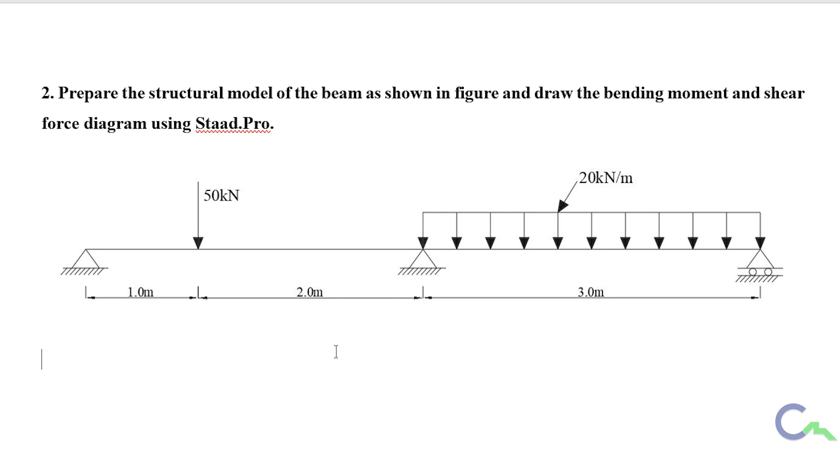They gave one continuous beam which has two spans. The first span is 3 meters and second span is 3 meters. In the first span, there is a point load acting at a distance of 1 meter from the left end, and for the second span, there's a UDL of value 20 kilonewton per meter. They also gave two hinged supports and one roller support.

So now I am going to explain how to solve this problem using STAAD.Pro.

I am using SELECTseries 6 version of STAAD.Pro. I will start with a new project, choosing space type of problem, and name it beam number 02. I will select length unit as meter and force unit as kilonewton, then click next. Here I will choose add beam type of problem, then click finish.

By default we can see the grid of 1 meter into 1 meter length. If this grid is not available, I will go for this icon, that is snap node beam option. If I click on that, I will get the grid.

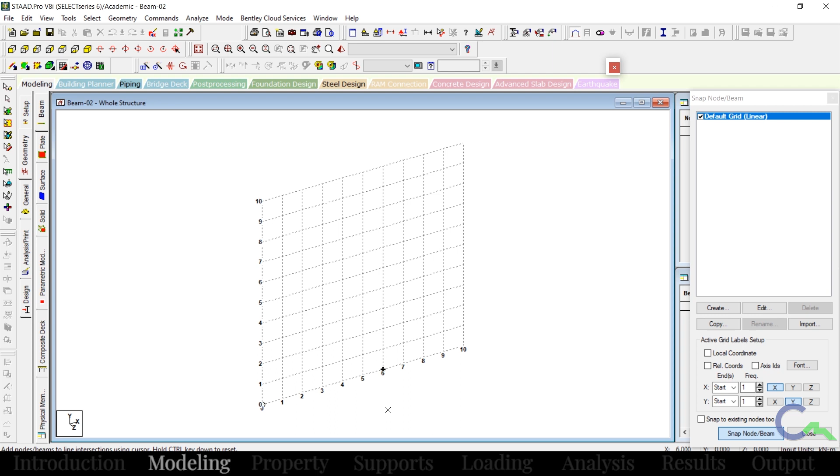First I have to prepare the beam, considering it from support to support. The first beam length is 3 meters, so I will start preparing that model, creating one beam from 0 to 3. We have to make sure that this snap node beam button is in blue color, then only it will snap to the points or grids.

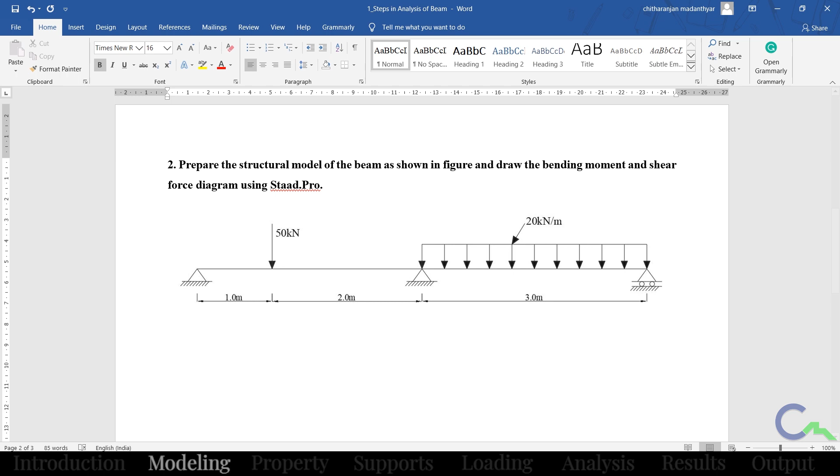The second beam is also having a length of 3 meters, so from 3 to 6 I am going to create one more beam. Once it is created, then I will close this window.

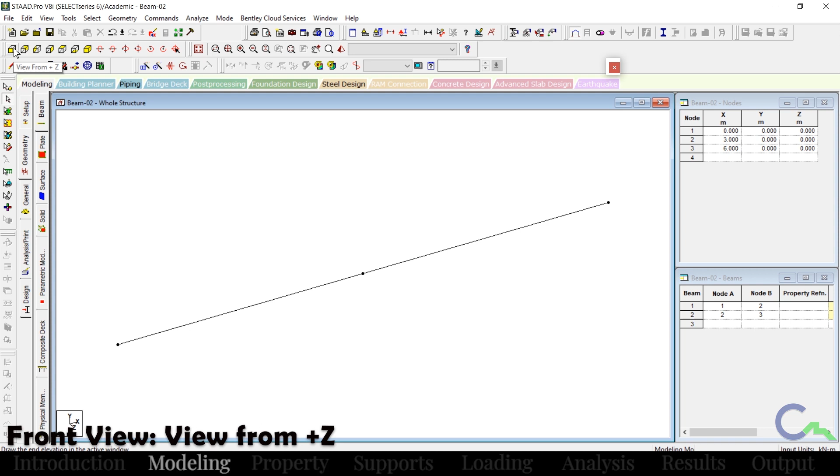If you want to see the entire structure, I will go for this icon, that is display whole structure. This is in isometric view. I will go for this icon, so now I can see it in the front view.

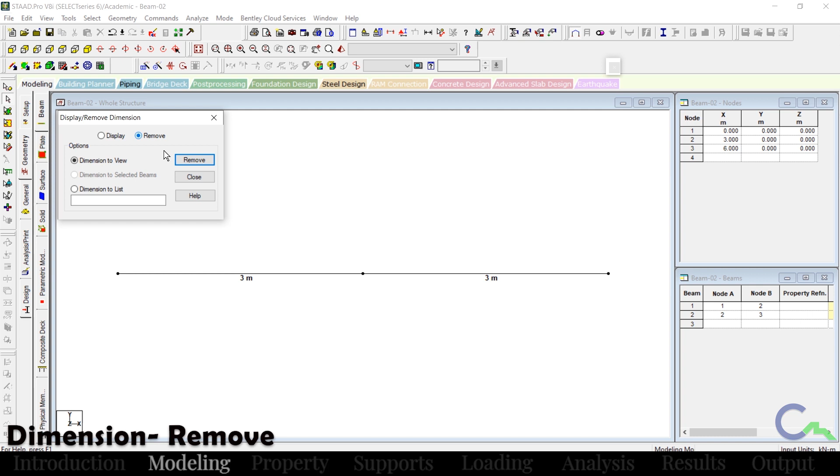If you want to check the dimension, I can go for this icon, that is dimension. If you click on display, it will show the length of each and every beam. If you don't want to see that, again go for the dimension option, then go for remove, and click on remove. It will remove the display of dimension.

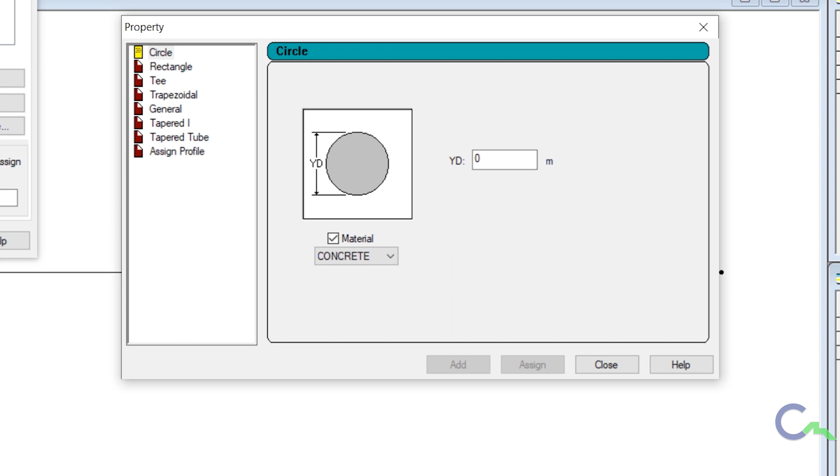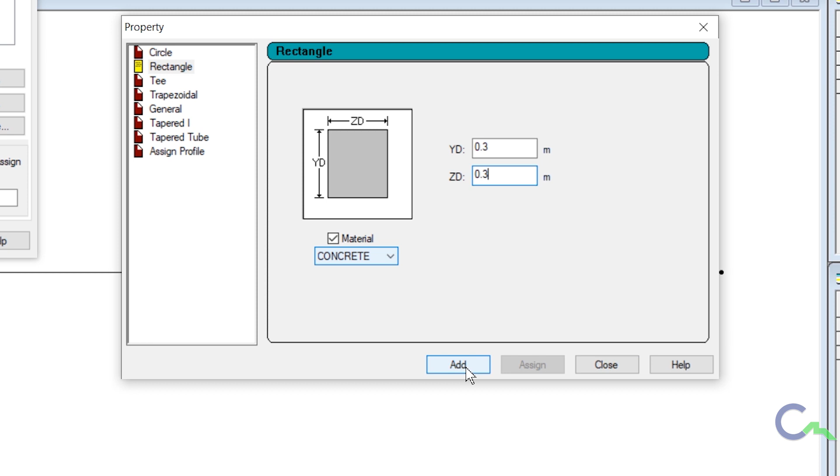Once I create the model, the next step is to create the property. I will go for this icon, that is property page, then go for define. I am going to give the property for this beam, that is rectangular property. I will give 0.3 and 0.3 as the dimension of the beam, so in feet it is 1 feet into 1 feet. Then I will select concrete as the material, click on add, then close.

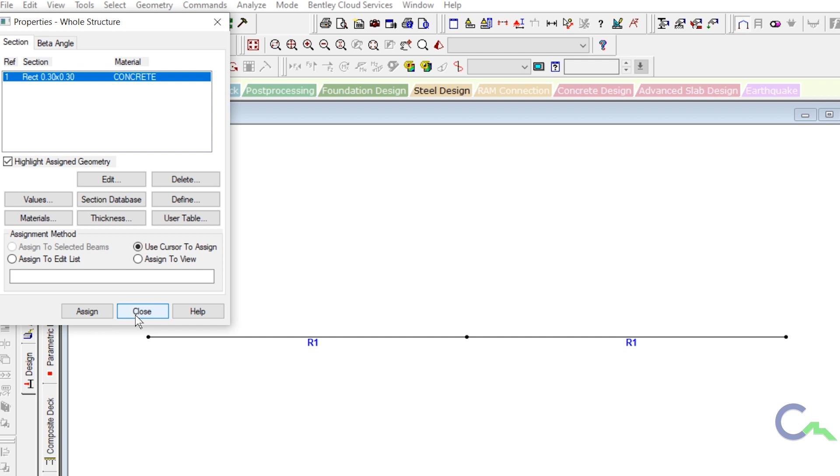Now that the property is created, I am going to assign it to these two beams. I will go for use cursor to assign option, then click assign, then click on the first beam, then the second beam. Once it is assigned, click on assign again, then close. You can see whatever property you provided using the 3D rendered view option that is available here.

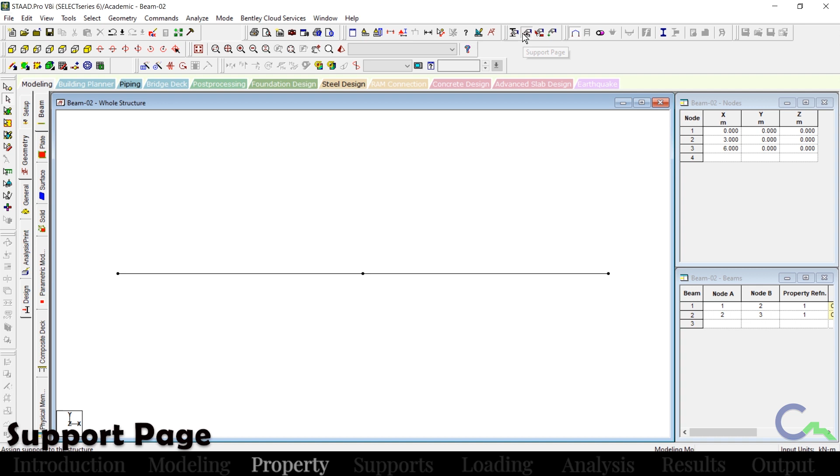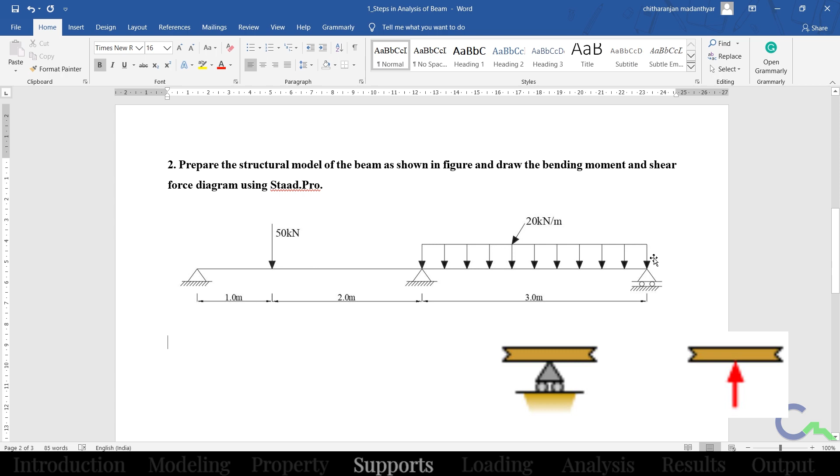Once I provided the property, the next step is to give the support. I will go for this icon, that is support page next to the property page. Looking at the diagram, the first support is a hinged support, which has two reactions, horizontal and vertical. The second support also has two reactions. The third support is a roller support, which has one reaction, that is in the vertical direction.

In STAAD.Pro, I will go for the support page, and I will show that one again. In this, I will go for create option, then go for fixed but option. The first support I am going to create is a hinged support, which has two reactions, horizontal and vertical. Whatever I check, I am releasing in that direction; whatever I am not checking, that is restricted. So I will click on add, and I have created that support.

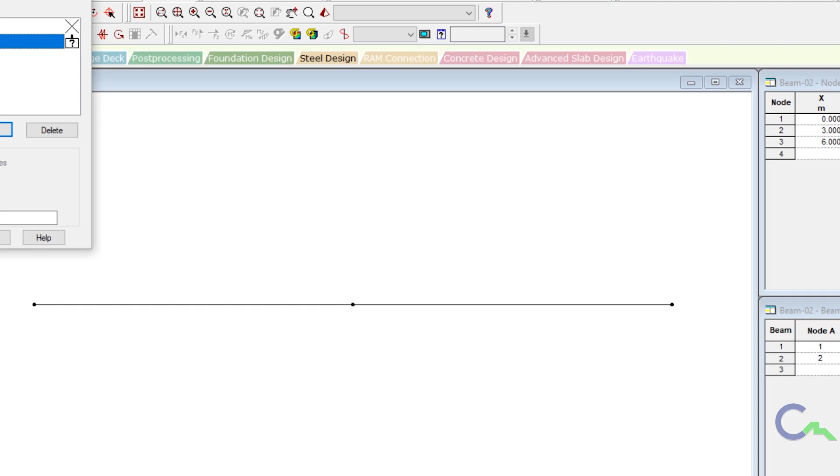I have to assign supports on the first node and second node. Using the cursor, I click on assign, then click here, then click on the second node. Once it is assigned, I click on assigning again.

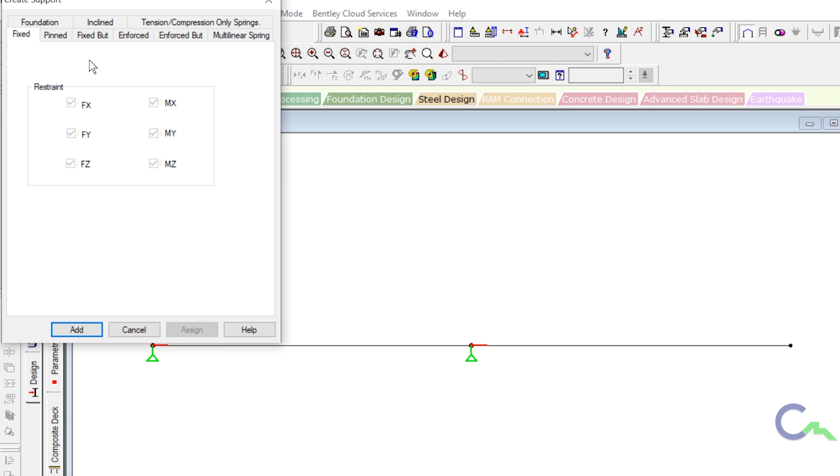The next support I am going to create is roller support. I click on create and go to fixed but, and restrict it in the FY direction, then check all other directions so it is restricted in the Y direction. Then click on add, and select that support, support number 2.

Using cursor, I assign on the third node. So I assigned all the supports. Then I will close this window. Next thing I am going to do is apply loading.

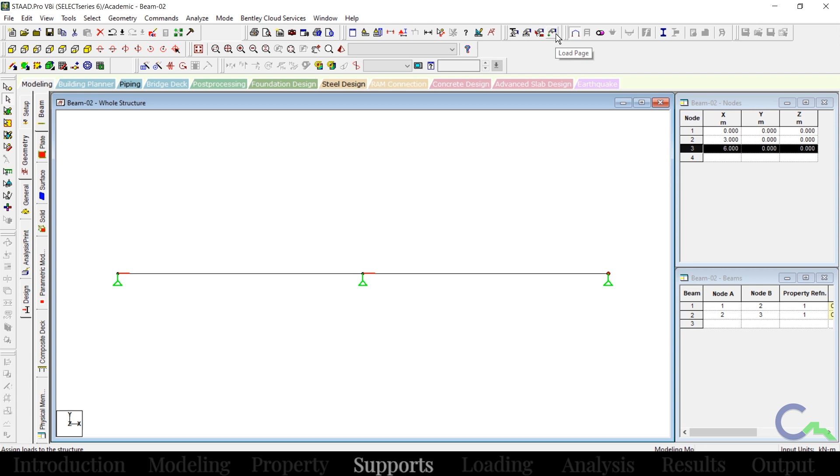I go to the load page, that icon is available here. Under this load case detail, I am going to create one folder. Click on load case detail, add, then by the default name I create one folder. Then click add, then close.

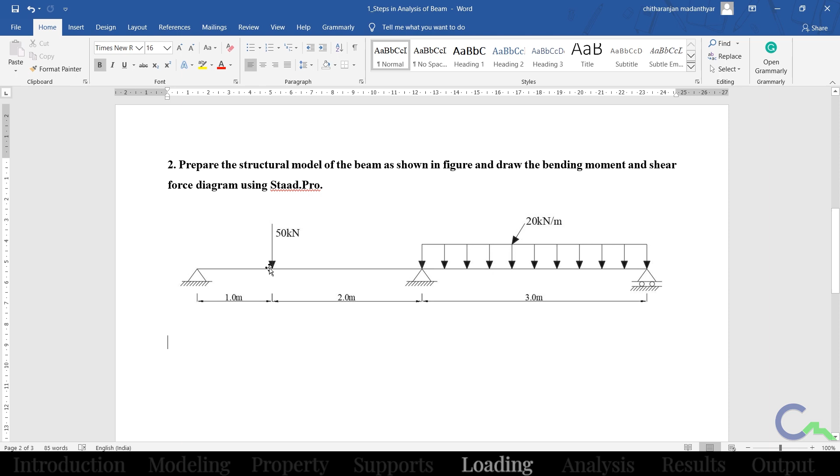Under this created folder, I am going to create two loadings. The first loading is 50 kilonewton, active at a distance of 1 meter from the start node. First I will show that one. I click on this load case 1, then add.

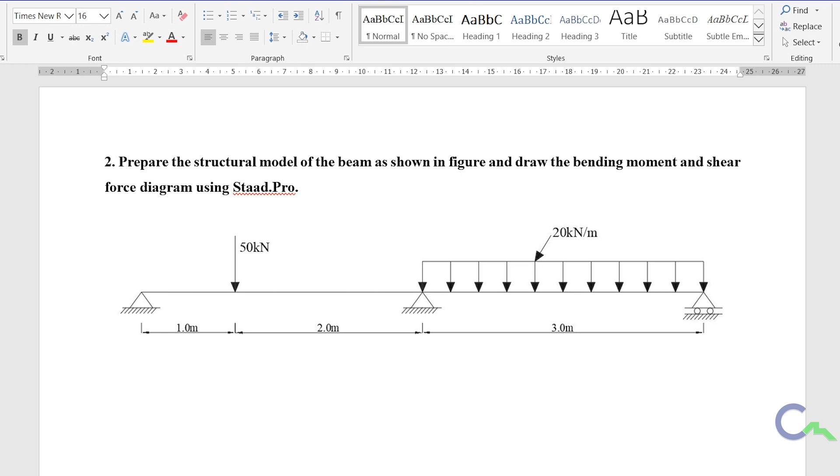Under member load, the first force I create is concentrated force, also known as point force, with a value of 50 kilonewton acting in the downward direction. So I apply that force, 50 kilonewton acting downward, under member load concentrated force, entering minus 50.

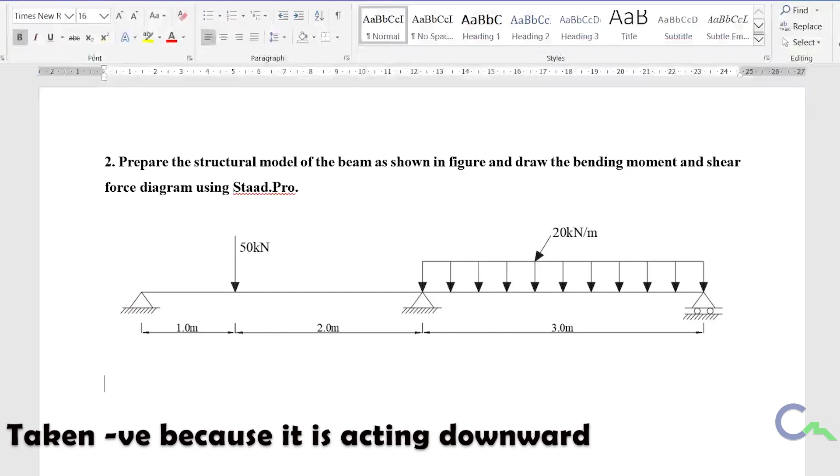In the problem, it is acting at a distance of 1 meter from the start node. While creating the member, I created this as first node and second node; for the second beam, this as first node and second. Therefore, from the first node, it is at a distance of 1 meter, so I have to give this D1 value as 1 meter.

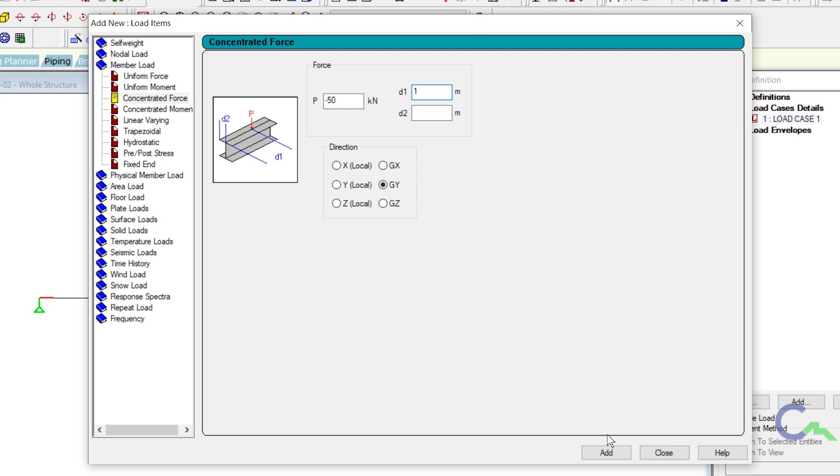Suppose if it is acting exactly at the center, there's no need to give this D value. But if it is not acting exactly at the center, I have to give the distance from the left hand side. Then it is acting in the GY direction. Then click on add, then close.

So I created the first loading, a point load of 50 kilonewton acting at a distance of 1 meter from the start node. Going to assign using cursor, I click on this option assign, then click on the first beam. So I can see the loading, but it looks like a very high value because the scaling is not proper.

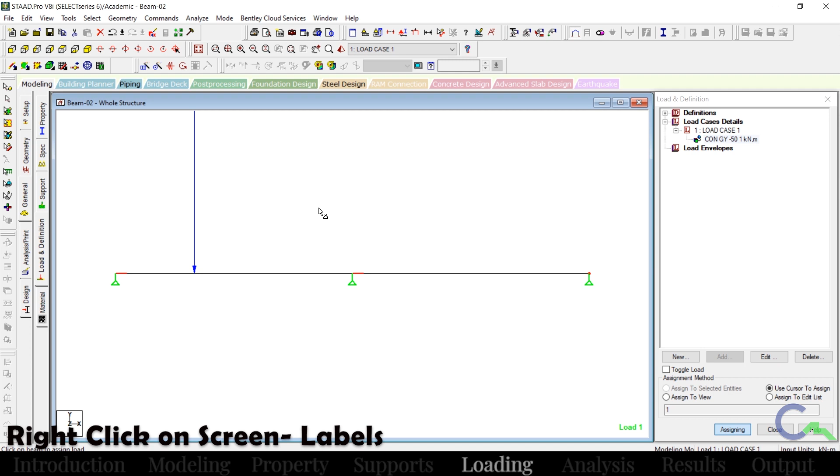To change the scale, right click on the screen, go to label, and you will get the option scales. Before changing any scale, click on this icon, apply immediately, because as I change here it updates on the screen. So I applied the point force.

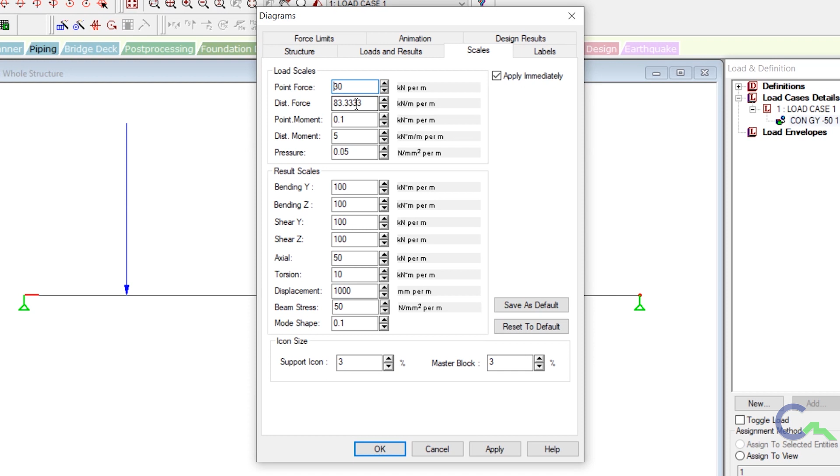I will increase the scale here, maintaining it at around 30, which gives a nice look. I will make the distributed force scale also 30, because I want to maintain all the scales uniformly. So whatever is required you can change, then click apply.

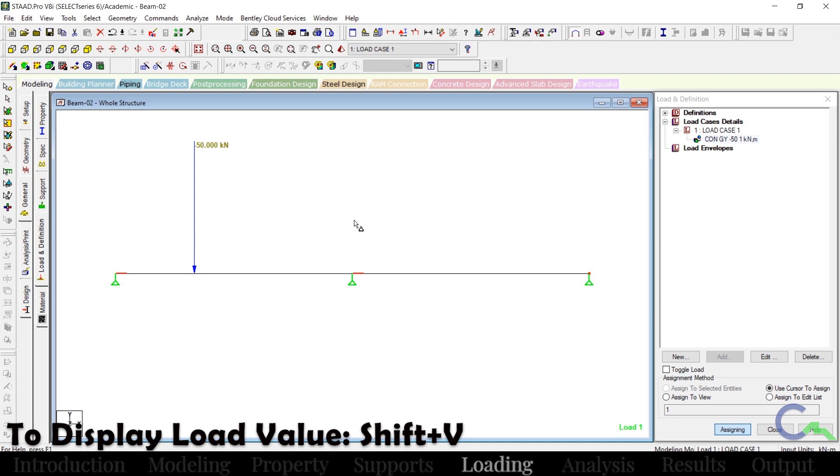Then OK. To see the load value, I can use Shift V as the shortcut, or if you don't know the shortcut, right click on the screen and go to label, where we get the option labels. In that, enable the load value, and whatever you want you can enable here, such as node numbers and node points. Whatever is written in brackets is the shortcut key used to activate or deactivate it.

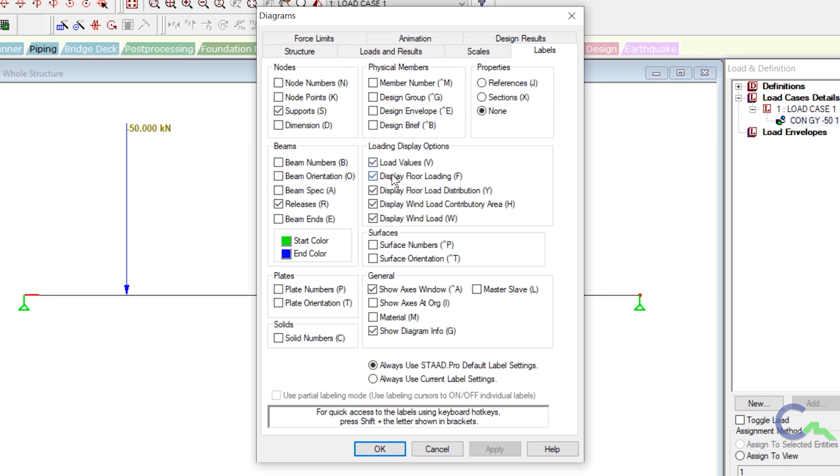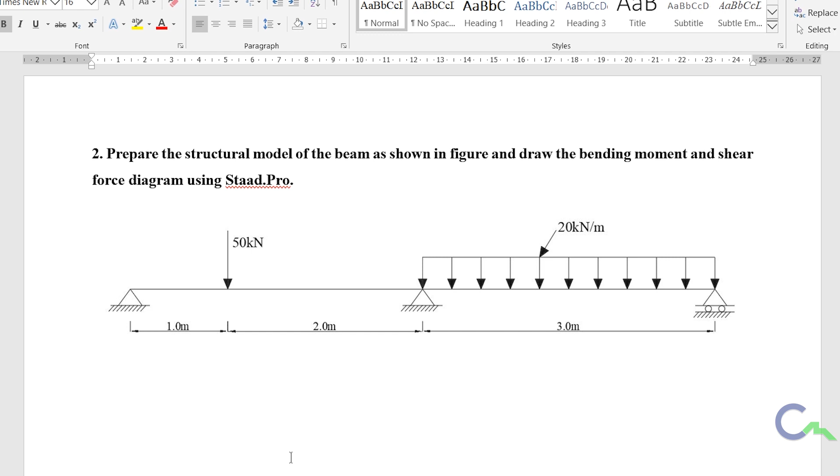The next force is 20 kilonewton per meter UDL applying on the second beam. In STAAD.Pro, under the same folder I am going to create that load. No need to create one more folder, because if I create it in a separate folder, the analysis would be done separately, and later you would have to do the combination. For that reason, I create all the loads under the same folder.

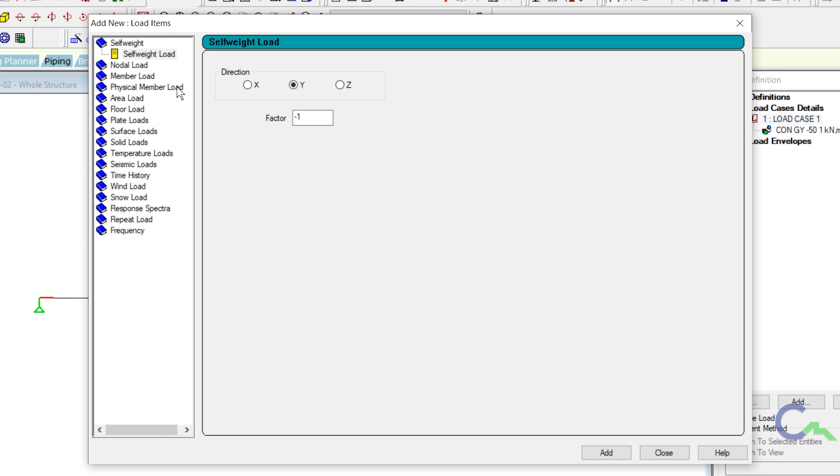I will click on that folder which I created at the beginning, then click on add. Under the same member load, now I am going to create uniform force.

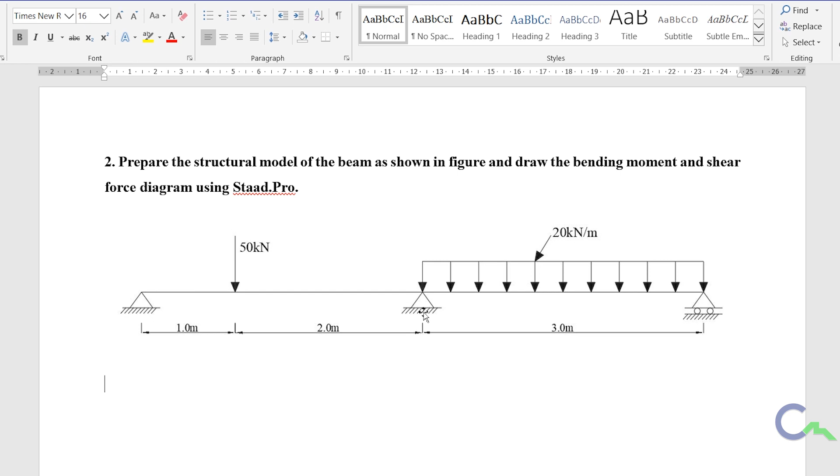That uniform force value is 20 kilonewton per meter, so it is acting on the entire span. So here I am going to create that value as minus 20. It is acting downward, so I have taken minus, acting in GY direction. In this problem also it is acting on the entire span, so I am not going to use this option.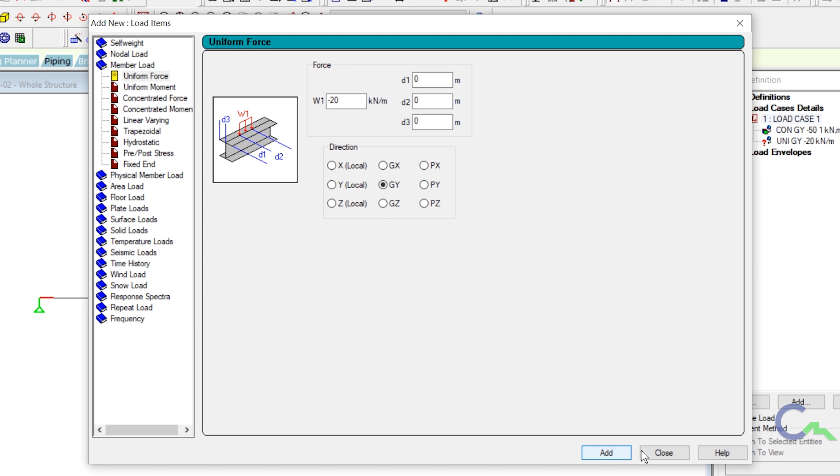Once I give the value, minus 20 and GY direction, click on add, then close this window. So I created that load, but it is not assigned on the beam. Using the cursor I am going to assign it. Click on assign, then click on the beam. So I can see the load here.

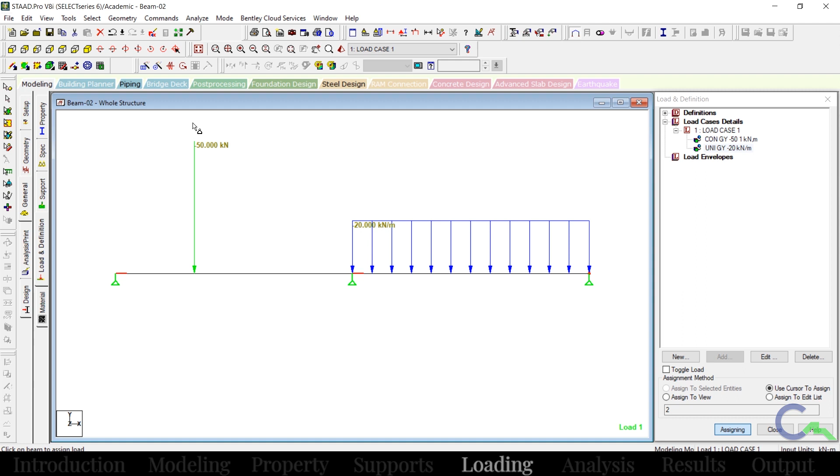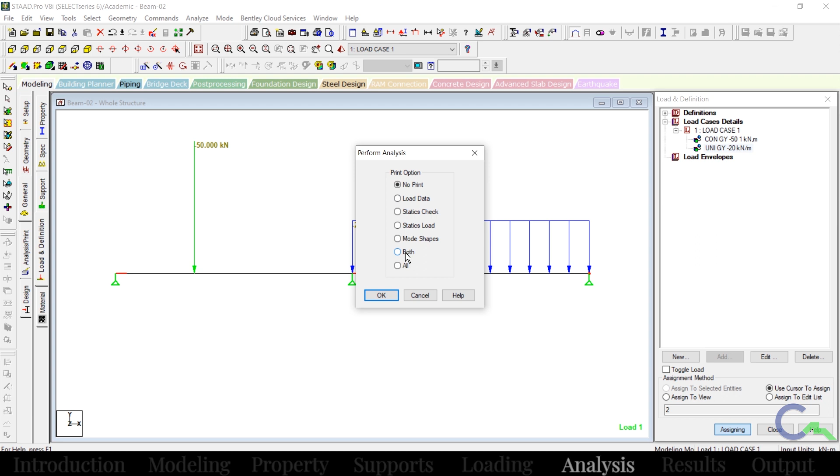Once I created the loading, the next step is analysis. Before doing the analysis, I have to give the command. I have to tell the software which type of analysis it has to do. So I will go to command, analysis, and click on perform analysis. I want to do everything listed here, so I will click on all, then OK.

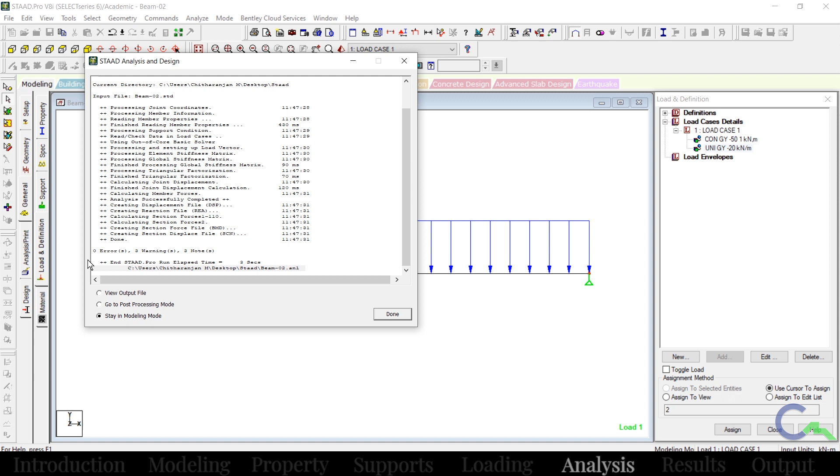Now I have to do the analysis. Click on analyze, run analysis, then click on save. It will do the analysis. If I get a warning, it is fine. If I get an error, I am not going to get the answer. We got 2 warnings, it is fine. So I will go to the post processing mode. Click on done. I will go to the result view option.

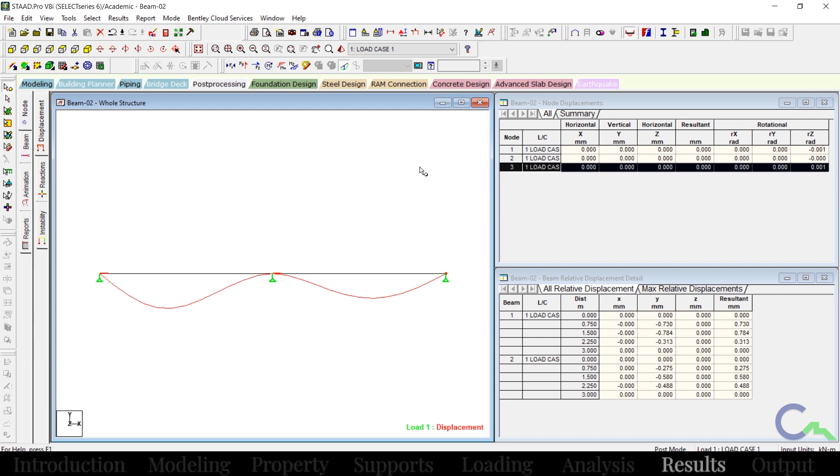I will enable automatic scaling and mode shape. Here I want to see shear force and bending moment values. Click on apply, then OK. By default it is showing deflection of the beam. I can turn off that icon, that is deflection. First I want to check shear force. For that I will click on this icon, shear Y force. So I can see the SFD, that is shear force diagram.

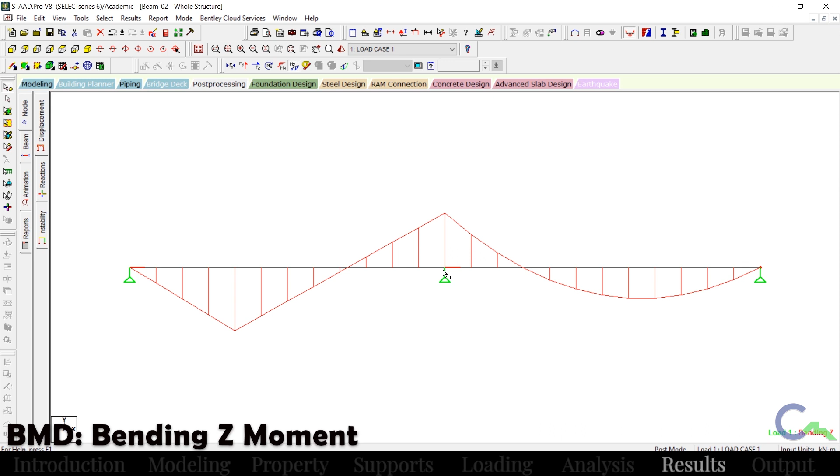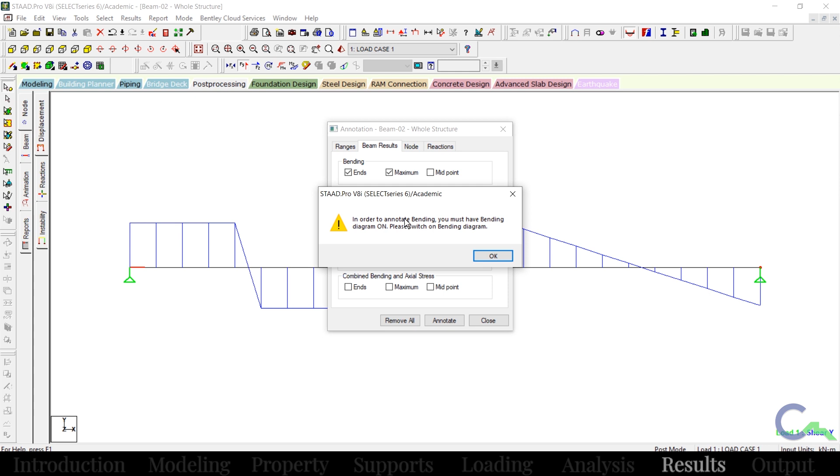Now I want to check the bending moment diagram. I will click on MZ, and I can see the bending moment diagram. To see these values, I will go to results, view value, then beam result. In that I want the bending moment value at ends and maximum. Click on annotate. It will give a warning: only if the diagram is on is it going to show the values on the screen. I will click on OK, then close.

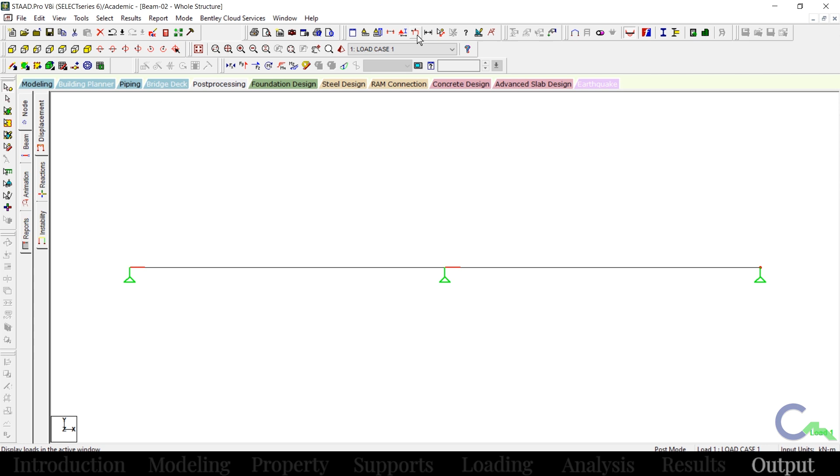Now I can see the shear force value. I will turn that off, and I can see the bending moment value. So I want to create the report. First I want to activate the loading diagram, so I can check the loading. You can do the adjustment like this.

I'm going to export this view. In the report folder, I created one folder, in JPG format. I want to save loading for the beam 2.

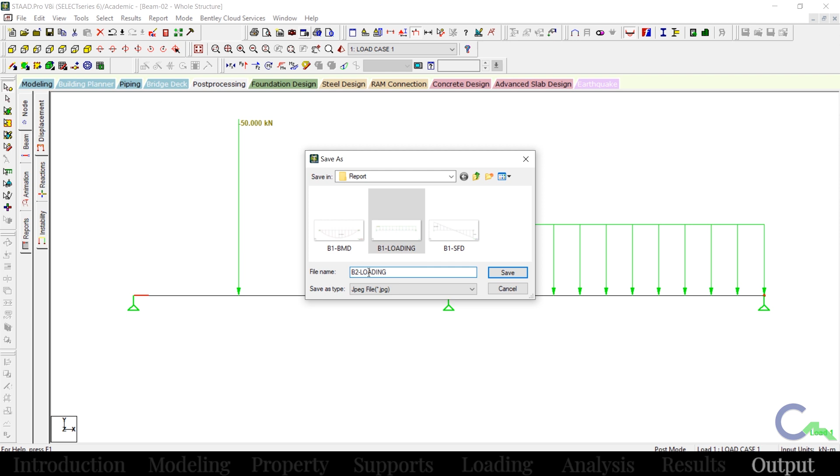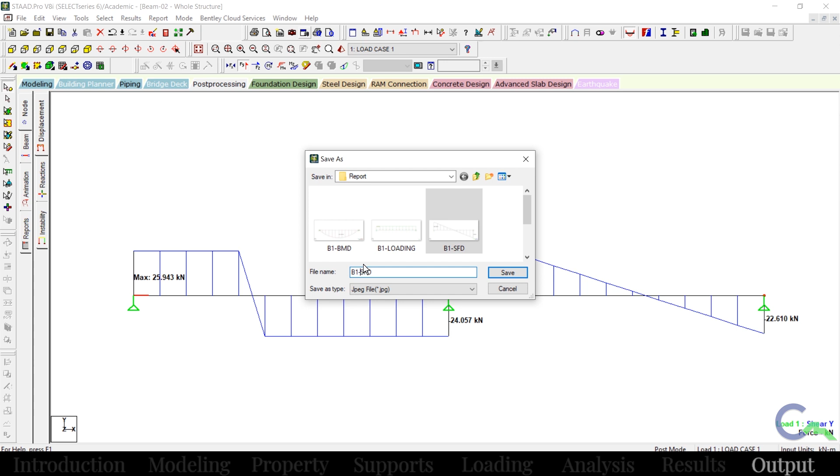So beam number 2 loading in JPG format I saved. The next view I'm going to export is the shear force diagram. I will turn off the loading diagram. I'll export this view using this icon. I will change the format to JPG. For the SFD, I will change the name to beam number 2.

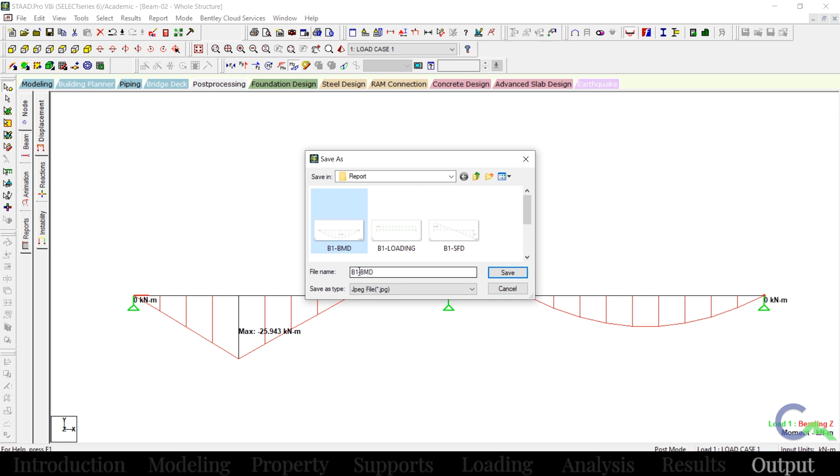The third view I want is BMD, that is MZ, bending moment in Z. So I will export this view. I will change the format to JPG, that is BMD beam number 2. I will save this one. After this I will go to that folder. I want to create one new Word document. So right click, new, Microsoft Word document. I will name it beam number 2.

I will open that Word document and import all the diagrams. So I will go to the insert option. In that I will go to the picture option. From this device, on the desktop, I saved it in the folder report. So B2 loading, I will import that one. I will name it loading.

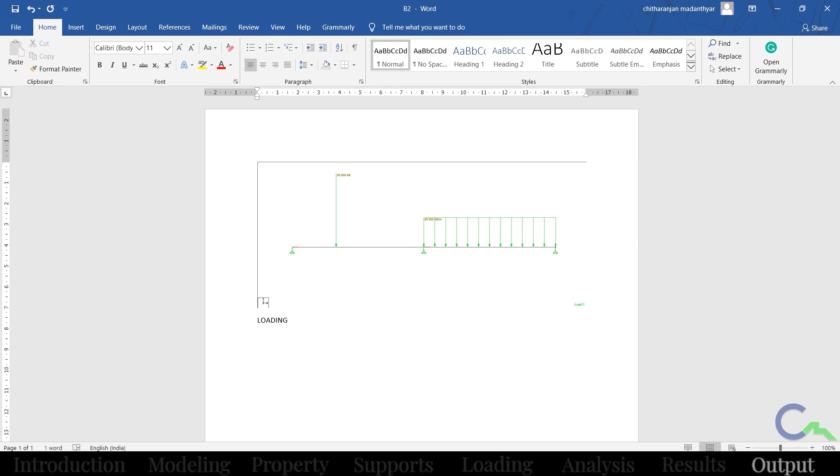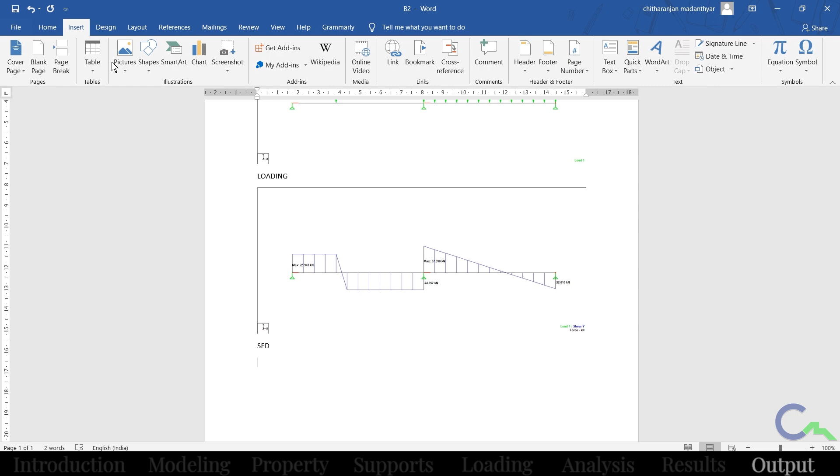After that I am going to import the shear force diagram. I will go to insert picture, from this device, the second beam SFD. I will name it SFD, shear force diagram. Now I am going to import the bending moment diagram. So B2 BMD. I will name this BMD. Once I complete it, I will click on save.

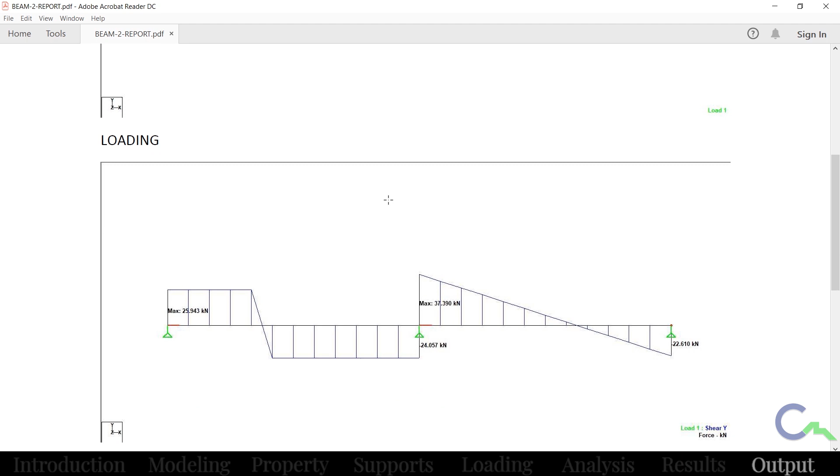Then I will export this as a PDF document. So you can check the report here. It has the bending moment, shear force and loading diagrams.